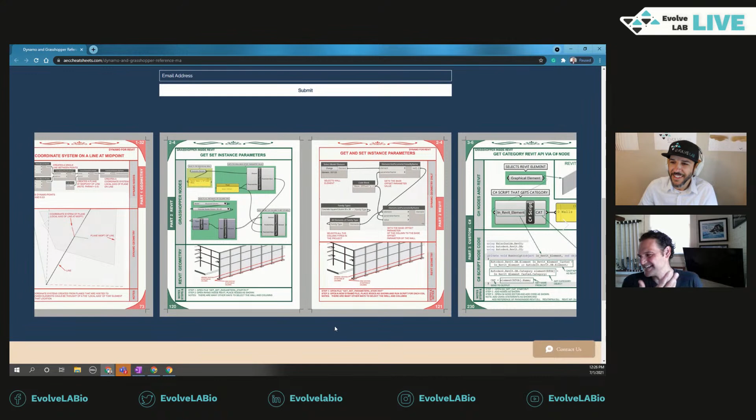I almost thought about calling it the Grasshopper and Dynamo Book of Concepts, but if I did that it wouldn't kind of feel real. So what I did was - if you scroll all the way over now to the very left there - I thought, okay, you know what I'm going to do? We're going to actually have not a table of contents, but a table of concepts. And so that's what happens here.

So if you want to get and set parameters, then you look through here, and I also color coded them so that they kind of pop. Like, okay, I'm gonna get and set a parameter, or I'm gonna build a surface, or I'm gonna write to Excel - this is the concepts that you look for, and then you learn the concept, and then you apply it.

That's the idea. So here is a table of concepts for Dynamo, and on the left is the table of concepts for Grasshopper. And that's how I thought would be the best way to go about dealing with this as a kind of reference manual.

One more thing, so I'm doing all the talking, right? But it's okay, you're good. You're supposed to, one more thing too, is that these are books of individual concepts.

So for example, the example you showed where it gets and sets parameters, well there may be another example that builds, let's say, sets the elevation of a slab based on the elevation, the get and set parameters that you got out of your parameters. Well, I don't show that in that one page, but I show that concept later on.

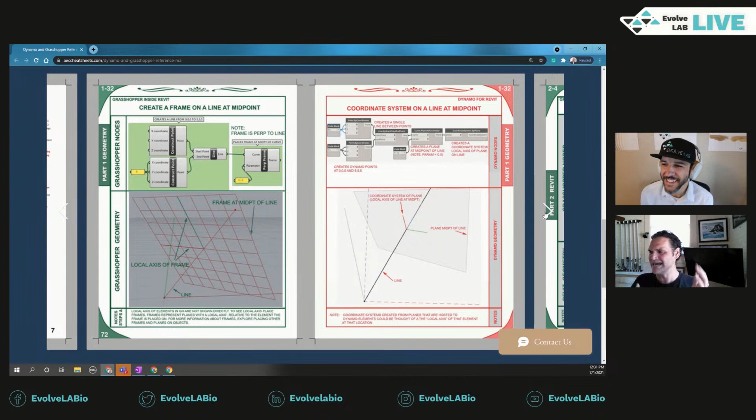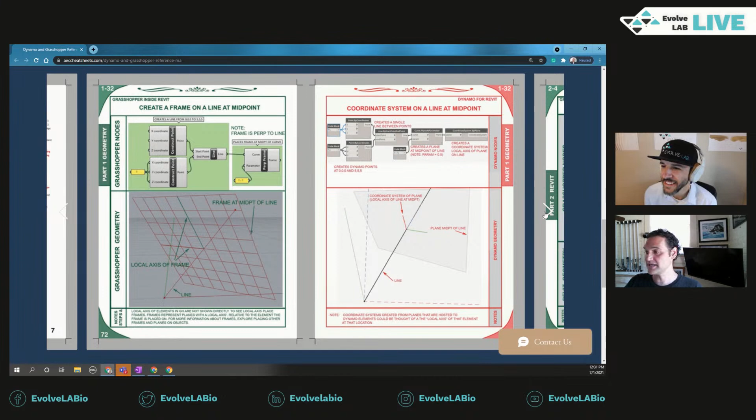And the thing I didn't realize this book would have is that it has been teaching Dynamo users Grasshopper, and it has been teaching Grasshopper users Dynamo. And that's what's really exciting to me, because above and beyond just being a reference manual for either Dynamo or Grasshopper, it's helping people with the equivalents.

And you know what also influenced me to do these equivalences is there was a show I watched. I can't remember the name of it, but there was a gentleman, I think it was called The Terminal. There was a gentleman who was stuck in an airport for months, and he didn't know how to speak English, but he found a book, I think it was a tour guide in his language, and he found the equivalent in English. And so he just went page by page, in the montage, and then learned English because of the equivalents.

And so I thought that's a great idea, so I really wanted to make sure I emphasized that here as well.

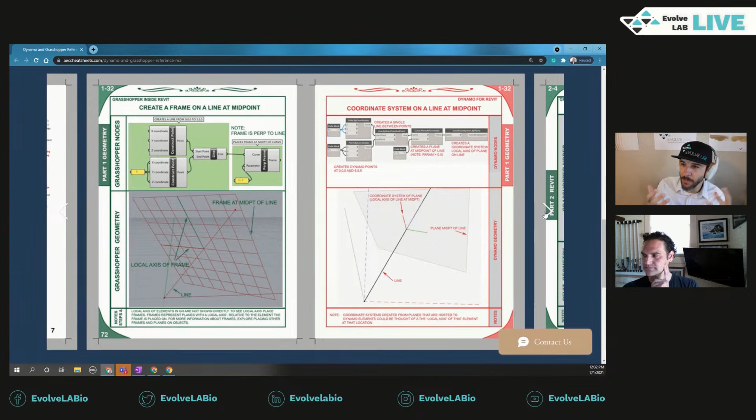That's great. Yeah, because as humans, one of the best or easiest ways to learn is by association, right? If you know something in one location, that's why metaphors are so useful when trying to teach someone something. So if you have the equivalent on either side, and like to your point, if you're a Grasshopper user, well, I know what the frame is, then it's this in Dynamo, oh okay, I get it. So to have that, I can see the parallel too to the gentleman in the airport - if you have that, it's almost like what is that other language in this other program, and how you would accomplish that in software terms.

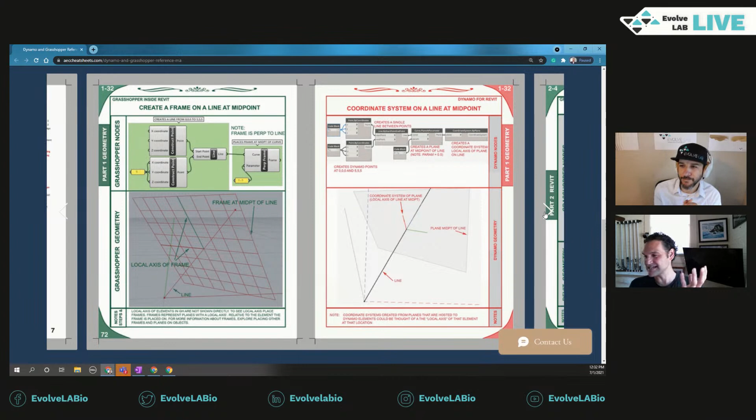So yeah, now that's not the only use of the book. That's kind of a byproduct, I'm going to call it. I know a lot of Dynamo users who buy the book and never look on the left green side, they only focus on the right side, and that's okay. I actually use this as well as a reference manual - I have my copy right here. I used it maybe a month ago when I was looking for some list management terms in Grasshopper, but I knew what it was in Dynamo. So I looked at my table of concepts, went over, and was like, oh that's right, and then I would use Grasshopper. So if anything, I'm using it too.

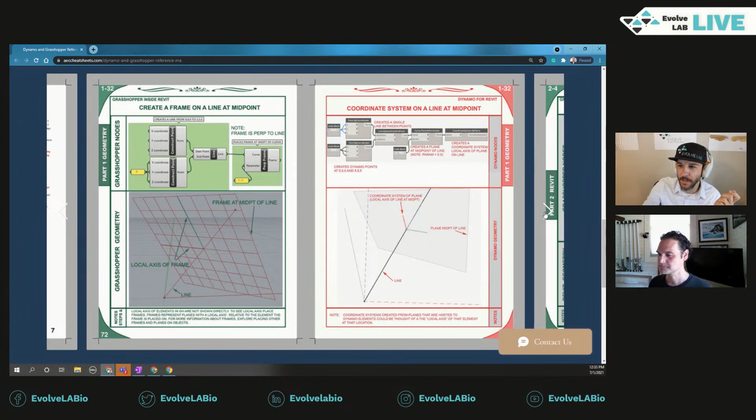That's great, I love it. Cool, I'm trying to think, do you have maybe some other examples? I don't know if you have any you're able to share on your side, Marcelo - it's okay if not. I have these on the website. Do you have some other examples on your side? It's okay if not. Sure, yeah sure I do.

Are there any questions from the audience we need to field? Not yet - everyone's saying they really like the content of the book, it's a great way to learn some of these concepts. People are really encouraged to see what others are doing in the industry to help each other out, which is great. So not a ton of questions yet.

Or here, there is one at the bottom. Marcelo, do you have a personal preference for either Dynamo or Grasshopper, or situations where you find one is better suited than the other? I do have a preference, and it's situational. That's an awesome question - did that come from Daniel? Yes, that's a cool question. Yep, Daniel. Okay, yeah, I do actually.

So maybe we'll start the conversation. You could just flick over one there, because there's an example. One more, okay. So in case anyone needs to get here, this is aeccheatsheets.com, and there we go - these are just some samples sitting at the bottom.

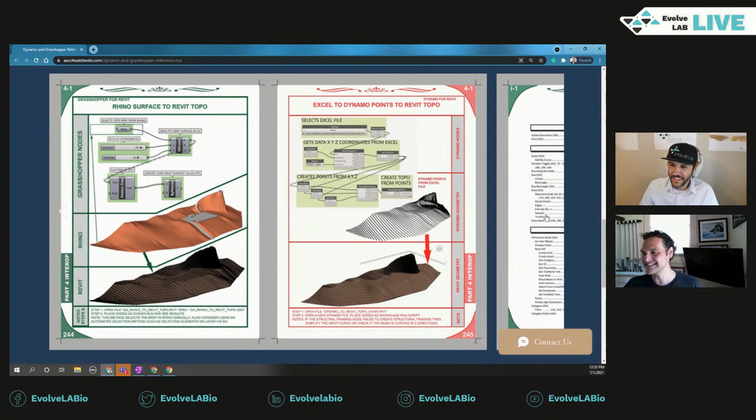Let me answer that question, but there's one thing I want to mention first. If you keep scrolling all the way to the right, there's one more thing I did, because I thought if this is a reference manual, you need a good way to find things. So one is the concepts, but two, I cataloged every node on every page through a node index. I'm just showing the Grasshopper index here in the sample, but the book actually has a Dynamo one as well. So if the name of the node is point.by coordinates in Dynamo, you just look that up in the index and it'll say page 10, 15, 20, 85. Or I want to do topography - topography is on page 8, 15, and 40 or something like that. So I wanted to make sure there was a way to do an index, and that was done through this node index concept.

This took me a very long time to do. I actually had to do it manually because it's very difficult to extract node names out of graphics, right? So anyway.

This is what this is all about. Yeah, this is great.

I want to answer Daniel's question. I prefer one over the other when it's situational. Let's paint a picture: say you have a rhinoceros model, built in-house or coming from a client, and it looks like that image in the rhino section, basically a surface with some brep surfaces and parking. Your job is to take that surface out of Rhinoceros and rebuild it meaningfully inside Revit. In this case, Dynamo would not be the best choice, because Dynamo doesn't talk with Rhinoceros as well as Grasshopper does. So my preference would be to take Grasshopper, use the new Rhino inside Revit technology, place these 6 nodes, extract that geometry, and rebuild it inside Revit.

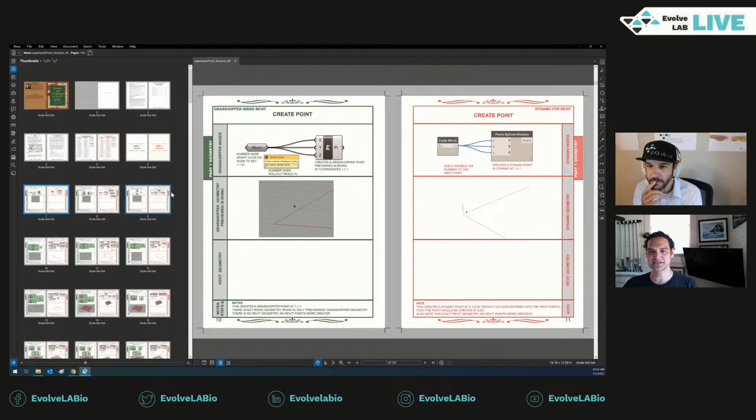Yep, okay, so this is actually the book, this is my proof copy, so I can flip through it. There's over 300 pages. It basically starts with the geometry section, and then it goes through the Revit interface. Oh, now my computer is slowing down. It talks about interoperability, more complicated stuff like vector normals, things like that. Then it gets into the Revit database.

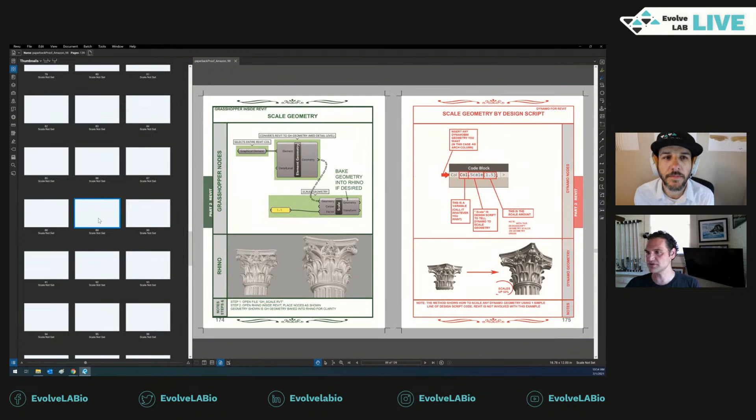And then there are other sections in here that talk about C# coding. It talks about some of the geometry creation and geometry conversions that we talked about in the past. We talked about it, but I didn't answer the question about conversion of different elements, so here's that example again that we showed.

Let me see if I can have another one pop up. But basically, Rhinoceros is a NURBS modeling environment, though you can model other elements. Revit, if you're talking about the massing environment or adaptive components, uses something called Hermite splines. But if you're talking about topography, that's actually mesh modeling, and it works a little differently when you create elements inside of families. So there is a bit of difference for computation.

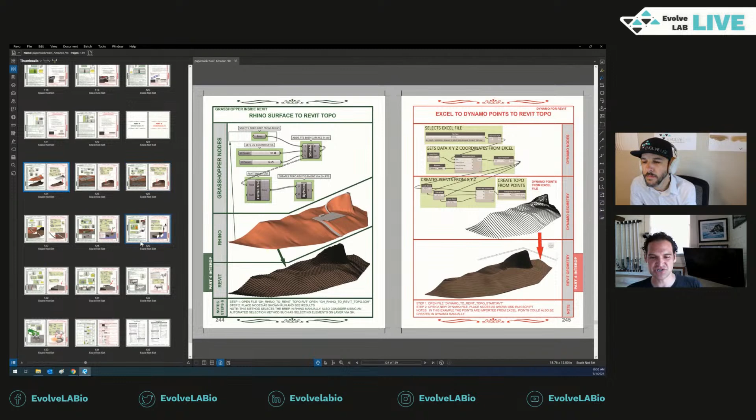Those aren't really big issues. If you have something extremely complicated, I have never seen any issues going from Revit into Rhino, because you can go the other way too. We talk about interoperability from Rhinoceros into Revit, but you can go Revit to Rhinoceros. I use that workflow sometimes. Sometimes I like to build my stairs in Revit and then send it to Rhinoceros because I like the way Revit builds the stairs, and then I bring it into Rhino. So it just kind of all depends on your personal preferences.

A few other things I can point out: the book also talks about interoperability and the ability now to use interoperability in a very meaningful way, a lot like the concept of Revit. So for example, in Rhino 7, which is what the Rhino Inside Revit technology is working off of, you do need a Rhino 7 license in order to get the Rhino Inside Revit technology and the Grasshopper Inside Revit.

You now have the ability to embed information, like through key value pairs, inside of Rhinoceros. So if you have designers in Rhinoceros who need to embed information, like this is the actual shape of the column, but it is also a W12 by 26, and we're using imperial units, you can actually embed that in the metadata inside of Rhinoceros. Then that information can be extracted out using Grasshopper, and you can rebuild it inside of Revit using that same metadata. So now this new technology is allowing Revit and Rhinoceros to talk together, not just geometry, but also parameters and information and key value pairs, things like that.

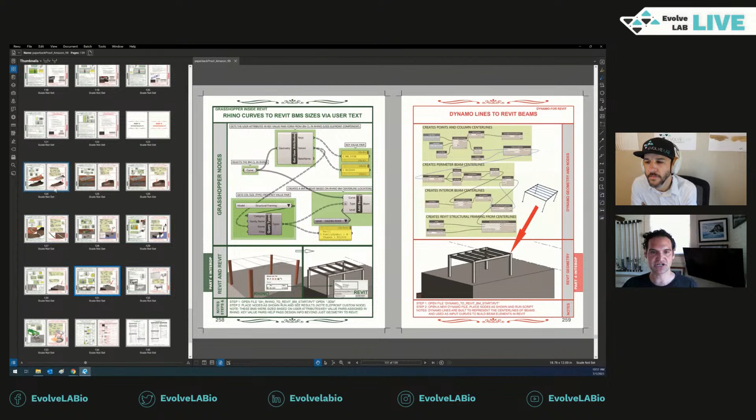At the very end of the book, there are some common tasks that you do in Dynamo, like running a script or turning things on and off. So this is great - you have common Dynamo tasks, and then common Grasshopper tasks on the other side. Like, how do you run manual versus automatic in Dynamo, and then how is that kind of equivalently done in Grasshopper? And how do you turn geometry on and off? There's a little kind of guide here as well at the end of the book that shows you how.

I like that. I didn't know it had that. I just thought it had the complete scripts, but it actually shows at like a node level or user interface level how to interact with the nodes.

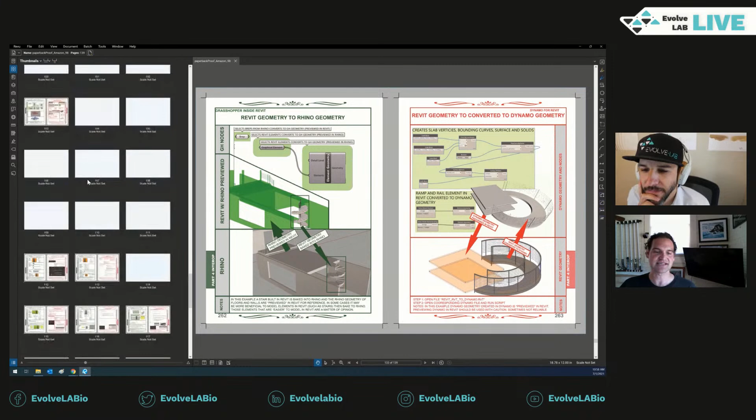Okay, that's right. And if you only want this page, you can just take a screenshot or watch YouTube, and you won't have to buy the book. I take the position that I do not want anyone to purchase this book until they feel it's 100% necessary for their office. I have had people tell me they bought the book for one single example they needed, but that saved them so much money above and beyond just the price of the book because of just that one concept they learned, like how to turn objects into 3D rooms, or how to adjust structural framing, or how to build slabs, whatever it might be.

Whatever it might be, right? There's almost 300 concepts in here. So if you could pick one or two that you need, then I think it's worth it.

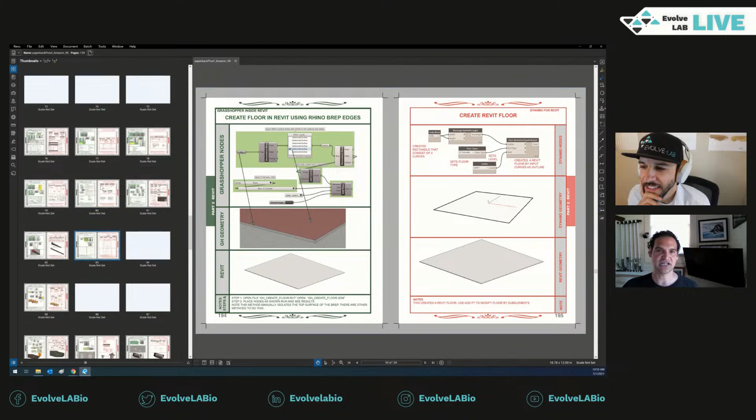So, Marcelo, how much is the book, and where can someone purchase it? Let me unshare my screen here so we don't go to infinity and beyond again. There we go. The book could be purchased, the link here is aeccheatsheets.com, and you can go to the Grasshopper Dynamo reference page.

The idea is I plan to make more books in this format. I'm actually working on an equivalent C# and Python one right now, as well as a few others. So this is just one in a series. You can go there, or you can just Google it on Amazon. It comes in hardback and paperback as well as ebook.

That's so great. The paperback is $75 US, although Amazon runs sales all the time. Right now it's on sale for $60. And take your billable rate and think about how much you might spend Googling and trying to find an answer, where you could just have this as a cheat sheet sitting on your desk. It's totally worth it. This is incredible.

You could also consider having it as a library at your office, so that way people can share it, and you could really get a lot of use out of the book. This is incredible, Marcelo, thank you.

Yeah, and you can see it's been well received. It's way above and beyond what I would have expected the book to do. But do you know how many books there are on Rhino Inside Revit right now? There's zero. Do you know how many Dynamo books there are out there right now?